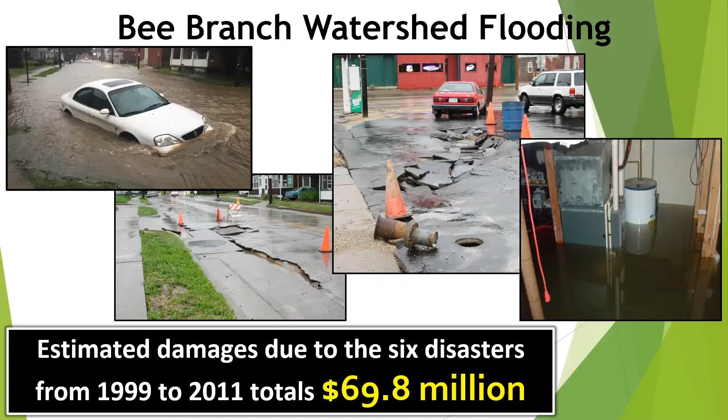Next slide, please, Darren. So for years, this was the reality in Dubuque for thousands of our residents on the north end. From 1999 to 2011, Dubuque experienced six presidential disaster declarations and way too many scenes like the ones you see here on the screen.

Next slide, please, Darren. The flash flooding that resulted from unprecedented rain events caused severe damage to homes and businesses, as well as public and private infrastructure, in some of the city's most challenged neighborhoods, where 50% of Dubuque residents live and work.

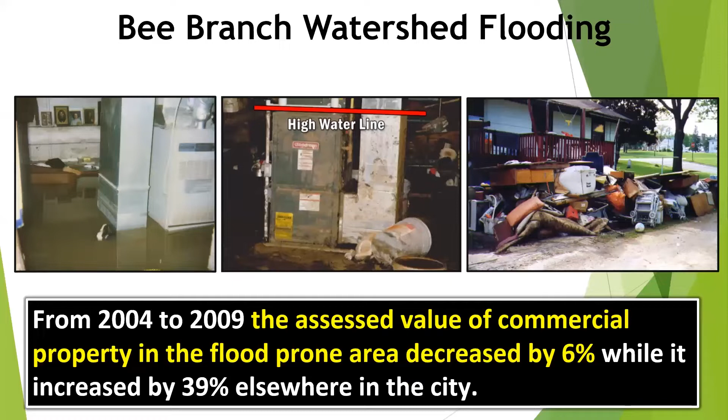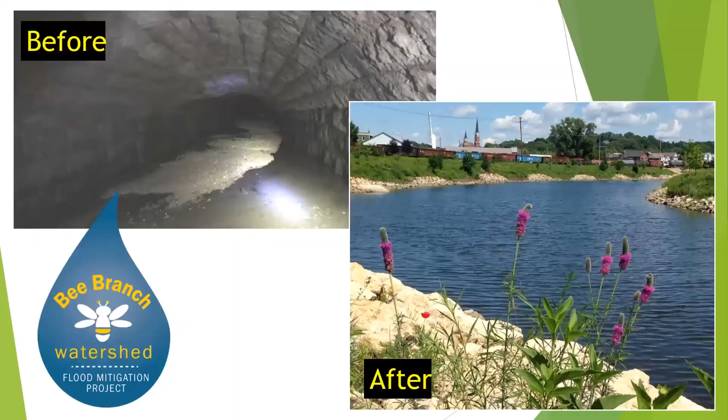One more slide here, please, Darren. It wasn't long before our community started to speak up and demand solutions, and the city of Dubuque listened. So today, we want to tell you the story about what our city did and how we did it.

Joining me to do this today is a team from the city of Dubuque staff who was absolutely instrumental in this work over the years. First off, we have Deron Muehring, our civil engineer. Also joining us is Alexis Steger, our housing and community development director. And then finally, Terry Goodman, our Director of Strategic Partnerships. With that, I'm going to turn it over to Darren to tell the next part of the story.

Thank you, Mayor. Talking about planning and engineering, as the mayor mentioned, 50% of our citizens either live and work in this watershed, and it's about a quarter of the size of our entire corporate limits is where the watershed exists. And the watershed is important because the most important thing for us was to work holistically and to work on the watershed level, which is another effort that the whole state of Iowa has undertaken as part of the Iowa watershed approach.

One of the first things that really worked for us was to plan our work, and don't think of a problem as too big. You really need to dive into them and figure out what's going on. So in terms of stormwater management, flooding, flood mitigation, look at the watershed instead of a more piecemeal approach, but develop a plan. Then, as the mayor mentioned, six times over a 12-year period, after we developed our plan, we had these intense rainstorms that resulted in flash flooding and presidential disasters.

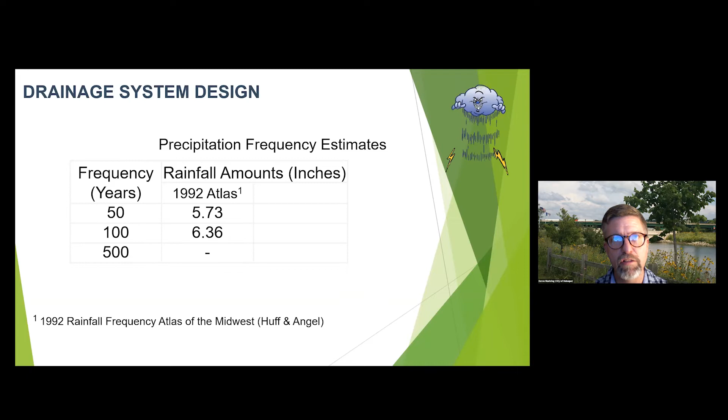The 100-year rainstorm is the storm that has a 1% chance of occurring in any given year. When we started looking at our watershed approach, we relied on Huff and Angel's work, partially funded by NOAA, which indicates how much rain we can expect for that 100-year rainstorm. From 1992, while we were designing this, that was about 6.36 inches of rain in a 24-hour period.

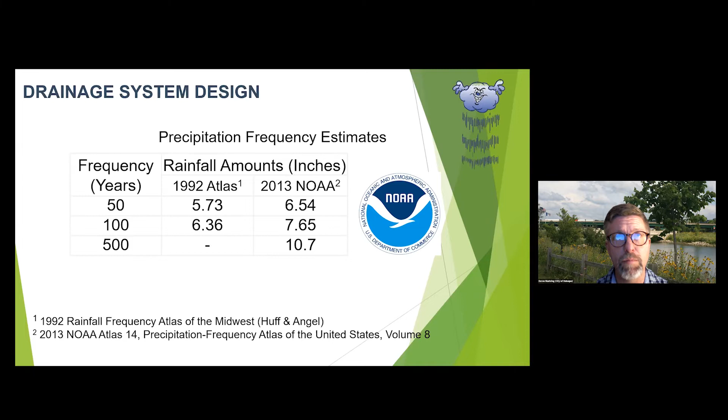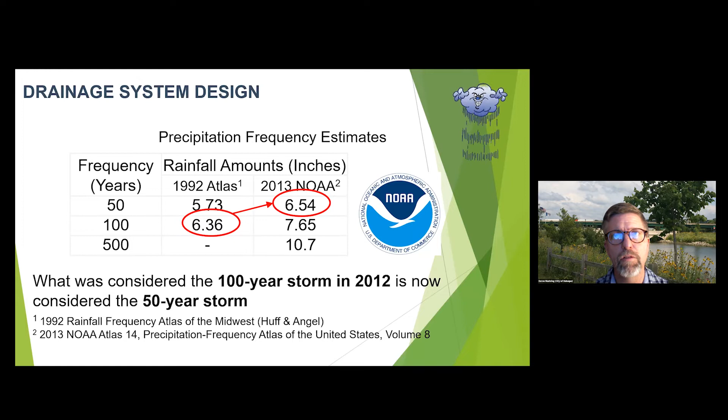In 2013, after many of the rainstorms that were mentioned, when all that new data is taken into consideration from 1992 to 2013, you can see those numbers increase. So when we were designing for the 100-year storm in say 2000, the new number is actually a 50-year storm. Designing for the then-100-year, we wouldn't get the benefit we wanted when we initially set out. And then what's going to happen in the future?

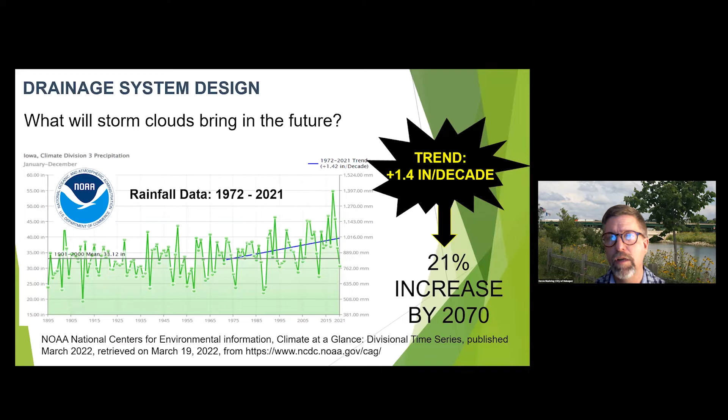Just looking at the last 50 years of rainfall data in Dubuque, based on information from NOAA, it's like a 1.4 inch increase per decade, which if that continues, would be up to a 21% increase by 2070 over the next 50 years.

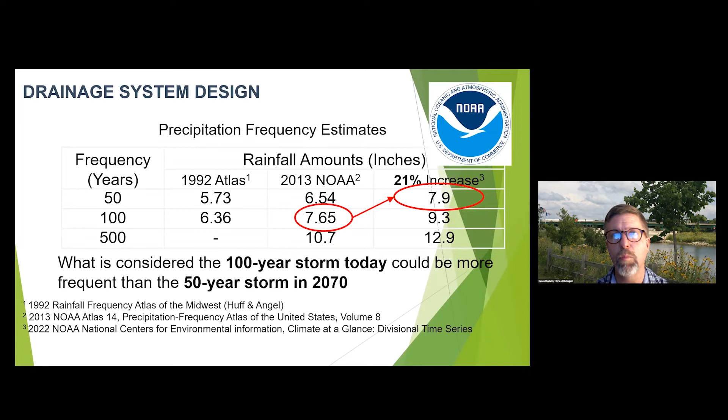So if we're designing for the 100-year today, in 50 years that's approaching what would actually be less than the 50-year potentially. That's what we're dealing with in terms of designing these systems, and why resiliency is so important, because you want to be prepared for whatever happens in the future.

One of the things is, don't change the goal, change the plan. Just because things change, you can always adapt. So what we did is we updated and amended our plan, and in 2013 had a drainage basin master plan amendment, which is really what came about with all of our improvements related to this watershed project.

I've given talks about this, and when someone asks what is the Bee Branch watershed project, I say it's the flood mitigation and resiliency, stormwater treatment, habitat creation, neighborhood revitalization, community engagement, transportation enhancement, tourist attraction so citizens can sleep at night project. It's way more than just a flood mitigation project, providing multiple benefits from multiple angles.

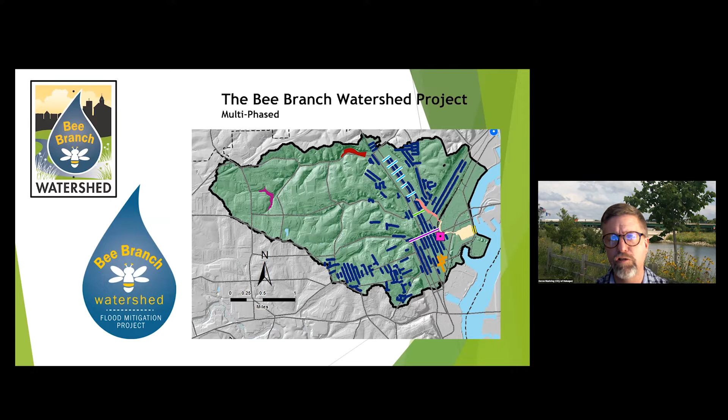All the colors shown here zooming in on the watershed are different practices we're implementing or improvements, things like pervious surface reduction and green alleys.

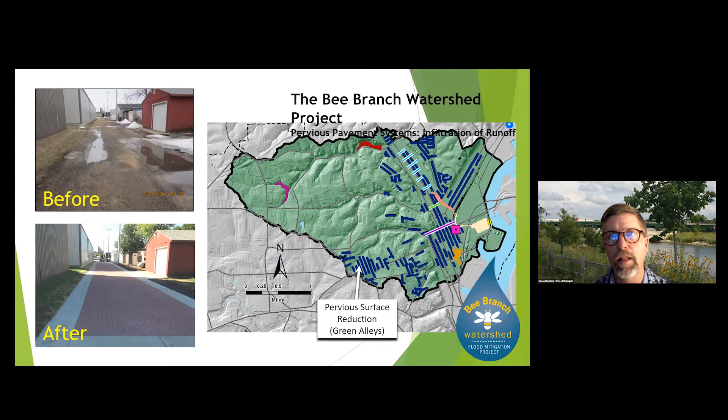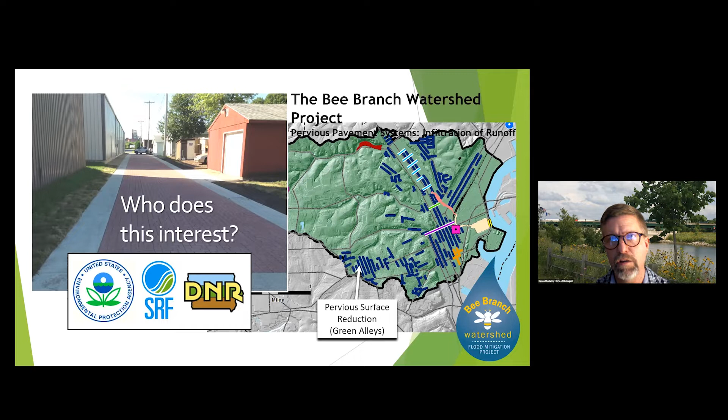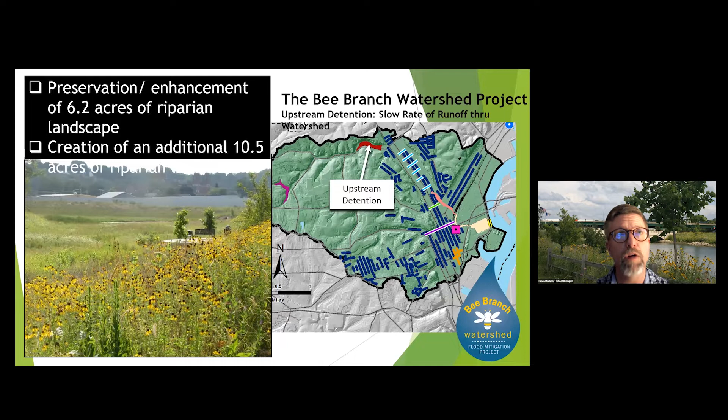When going through your project, you need to figure out, in terms of federal or state level participation or partnerships, who does this interest? In addition to flood mitigation, this also has water quality benefits by filtering the water as it goes through the ground. We also created upstream detention to impact the rate of runoff, and who would be interested in preservation or enhancement of riparian landscapes, prairie grass, and pollinator habitat? So again, looking at who this interests as far as possible partners for implementing your project.

And then our creek project itself, in addition to the beavers who really loved eating our new trees, who does this project interest? Quite frankly, a lot of different organizations at the local, state, and federal level.

What's important is to have your plan in place, so that when opportunities come around you're ready for them, ready to apply when a new program comes out from the state or federal level - you've got almost everything done. It's just a matter of copying and pasting into the application form, or renaming your project a bit to fit the narrative you're going for.

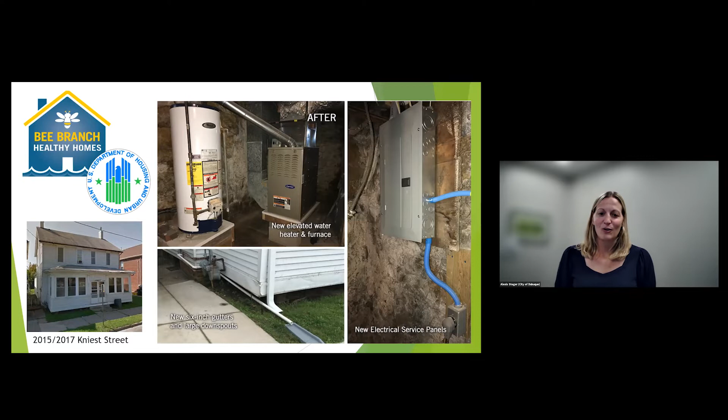We're in that phase now, and it is actually really fun for us, having worked through it for several years, to get to that point. I will now turn it over to Terry Goodman.

Thanks, Alexis and Darren, and thank you. It's a pleasure and an honor to be here today to talk about this exciting project. I have one slide, and it's really three slides: building relationships, building relationships, building relationships. City of Dubuque has a mantra, and that is people, planning, and partnerships. Everything the city undertakes is in partnership with some other organization or some federal or state agency. There's an old saying that if you're not at the table, you're most likely going to find yourself on the menu.

So while it's not just self-serving to have these relationships, it is important because our federal and state officials are our partners. We travel to Des Moines not only to maintain relationships with our elected officials in the State House, but also to visit and communicate with state officials, often managing federal funds that flow through the state, like CDBG and others. So we maintain relationships at the state level.

In Washington, we travel once a year with our mayor, city council, and community and business partners to renew our relationships with elected officials in Washington, but also with their staff.